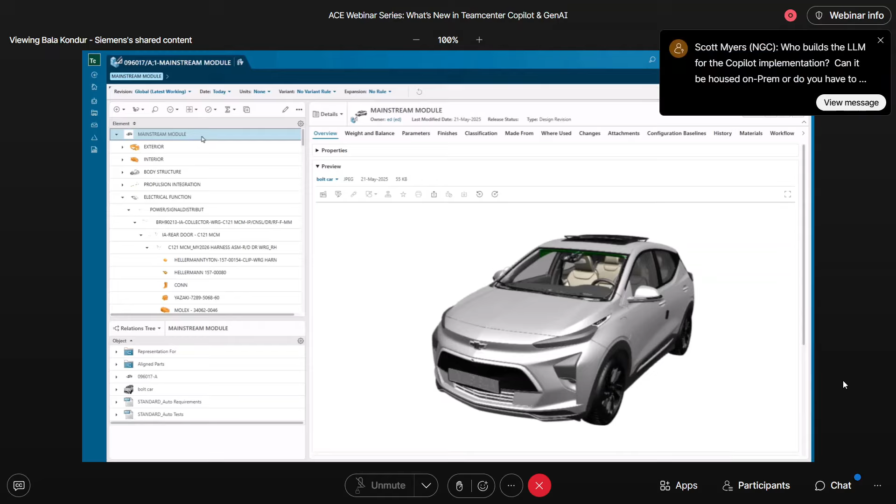This is Teamcenter, the active workspace interface—most of you have already seen it and started using it. Here I'm in the BOM application, called the ACE in active workspace. I have a bill of material structure open on the left, and the BOM itself has various documents attached to it. In this case, I have a couple of PDF documents attached, which is kind of typical—you just open a BOM, and the BOM is attached to documents, what you might commonly see in your organizations too.

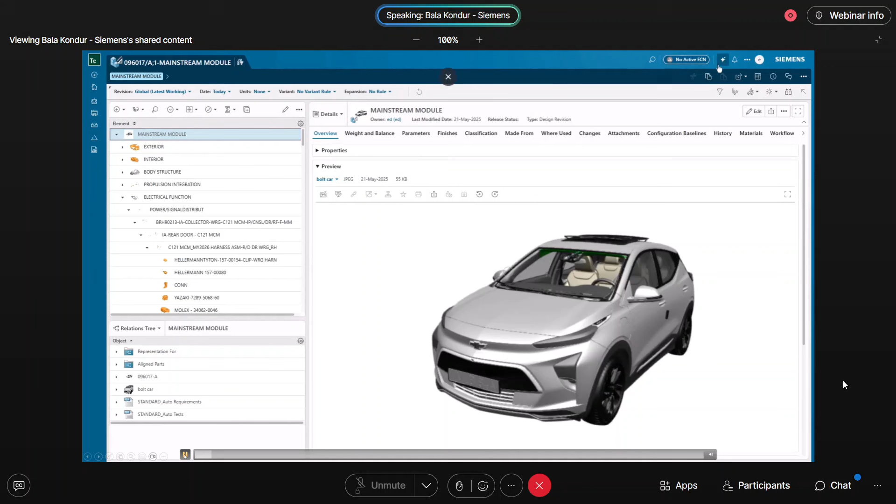I'm going to go ahead, and now you'll see me open the Copilot. I popped out the Copilot, and I open the requirements spec here—it happens to be a PDF document, almost a 400-page document. Just pay attention to the drop downs here as I run this video on the right.

So I click the dropdown, and if you look at the context, I selected the currently open document. So I've focused the Copilot on this document, the one that's currently open, and I'm going to proceed and start researching this document by asking a question.

It's an automotive spec, so I'm asking a question about the ADAS system, and I'm also directing it to generate the output in a certain format that I require. I said generate this in tabular form, and also highlight numerical values, numerical number ranges, and it did that.

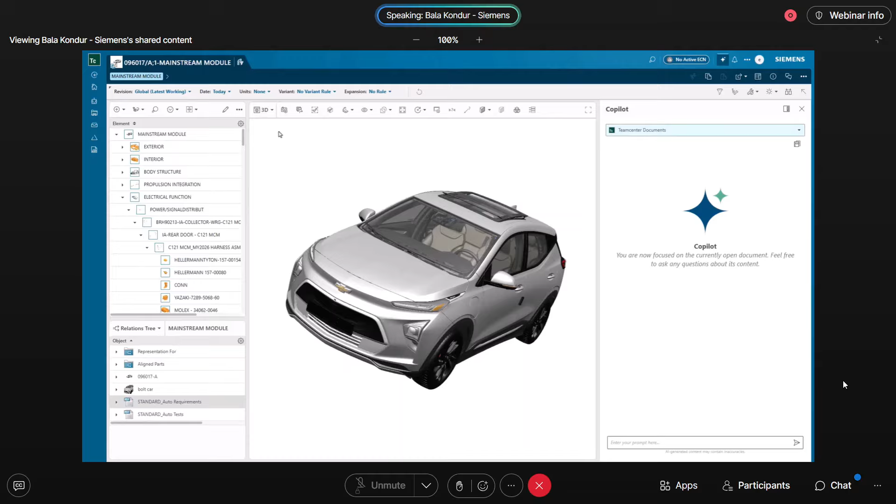Now let's do a BOM focus here. Let's say I switch to visualization mode, and now I'll go into the BOM mode. I said, let's focus on the currently open BOM. And then I come back here and ask a question: locate me the radar on the BOM.

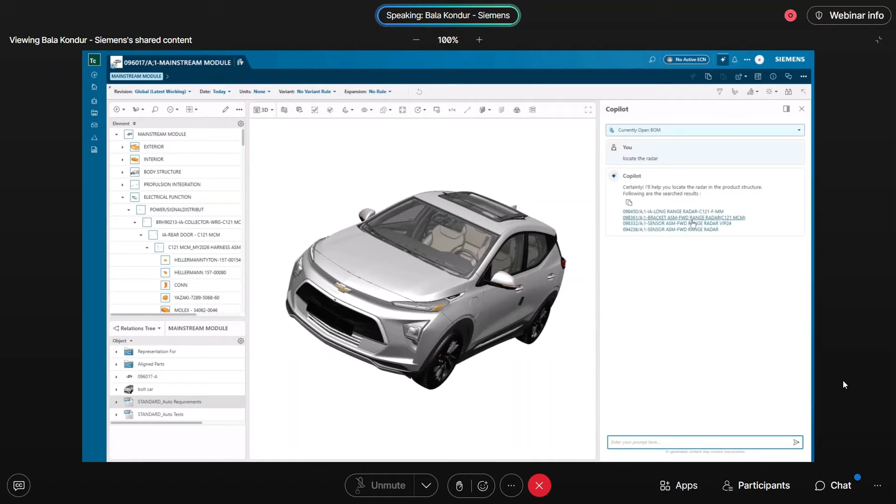So I get some hits here, and then I select the first hit, it's a radar there. And I follow it up with simply a natural language question: do me a proximity filter around the component selected.

So broadly, you can use the Copilot to interact with documents, interact with requirements, either in collections or single documents, and you can switch to the BOM focus. You can do what you might otherwise do with smart discovery, most of those commands, using natural language. You can also do work sets, issuing instructions to create work sets, proximity filters, and a lot more.

So a lot of things that you would otherwise have to use commands to perform, you can now perform with the Copilot. It's both knowledge discovery and ease of use. So these are the things that we're enabling with the Copilot.

Okay, so to put this in context and summarize what's available with the 2506 Copilot: the broad functions are document centric. One set of functions is related to documents and text, and you can interact with these documents and collections. You could have maybe 10,000 documents, and ask a general ChatGPT kind of question on all of them. If there's a relevant document pertaining to the question, it'll generate a response, and you can see what document was used as the source. That's the first mode, and you can also focus on single documents.

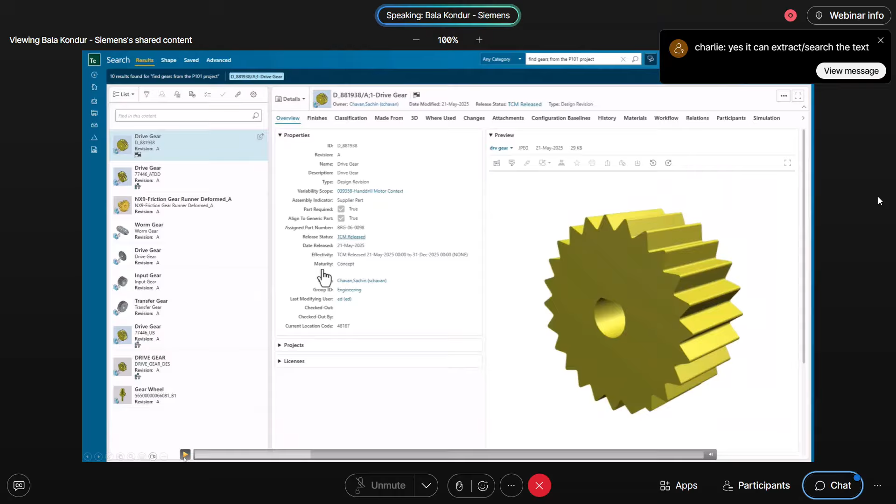So here I toggle natural language search on. And if you notice here, I just asked a very conversational question, right? I said, okay, find me all the gears from such and such a project. And I didn't have to very specifically structure my keyword search, right? I didn't use ands and ors and things like that. I just spoke my mind here, right? You can do things like this.

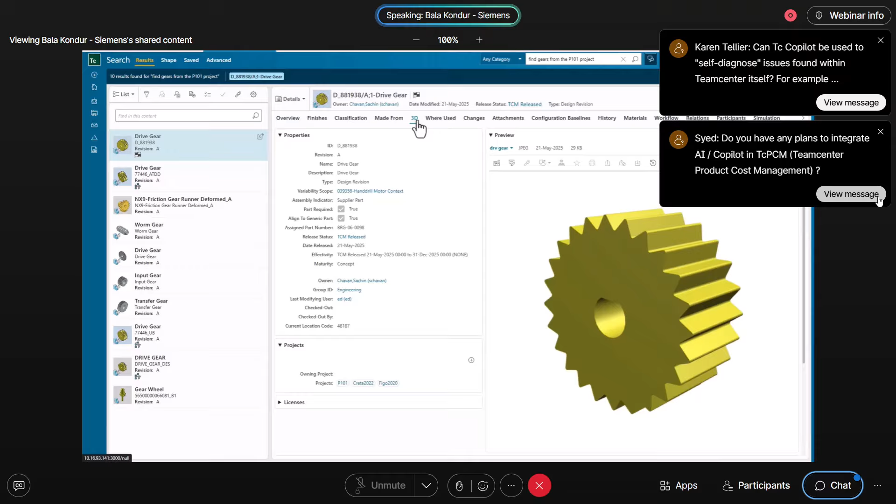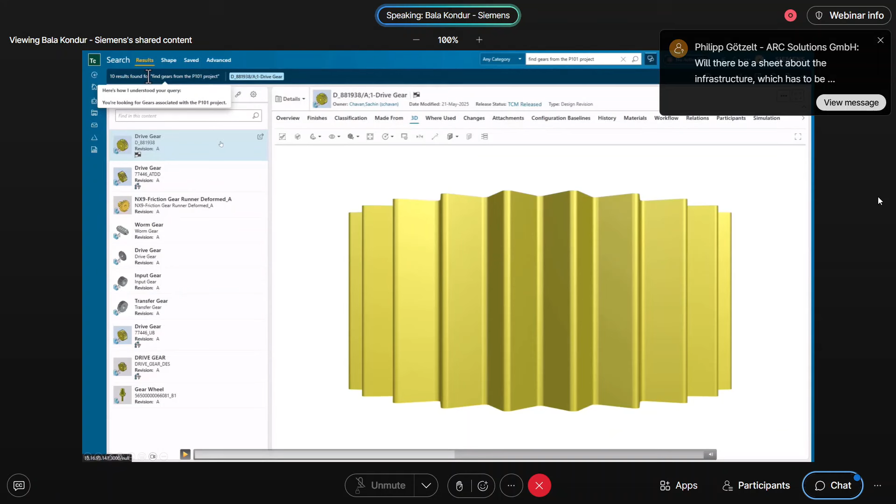You can just go ahead and ask your question, and it will interpret your question, and it will always play back the interpretation, right? Because that's important. So if you look here, it plays back the AI interpreted, how the AI model interpreted the user's intent, is always played back here. So it's saying that, oh, you're looking for gears associated with such and such a project. That looks good, right? And so you go ahead and it runs a query for you.

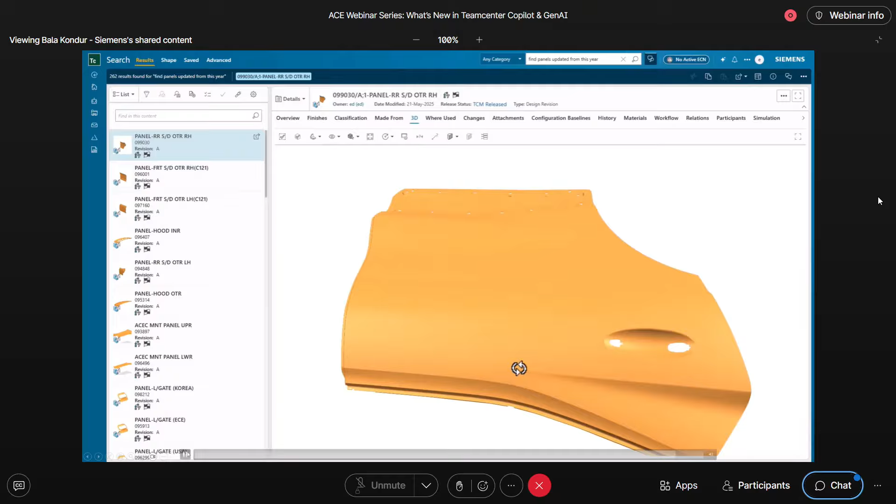And you can also do combinations of types, properties, time ranges, data ownership, and things like that, right? Here, for example, I used a keyword. I said, find panels updated from this year. This is a very straightforward question to a human person, right? I mean, you get it right away. But from an AI perspective, there's quite a few things involved here, right?

Because I said 'find' — this is my intent, right? I said, I'm searching for something. And then this was my keyword, right? Panel was not a type, it's not a property, but it's actually a keyword. It picked up on the keyword. And here I'm implying and indicating a time range. So you can interpret even these nuanced queries, right?

And you can make this much bigger. You can say, find panels updated this year, owned by this group, released such and such, etc. You can do all that. This is available in Teamcenter 25.06, and yeah, you can absolutely start using this with 25.06, and this is also available in the 24.12 release.

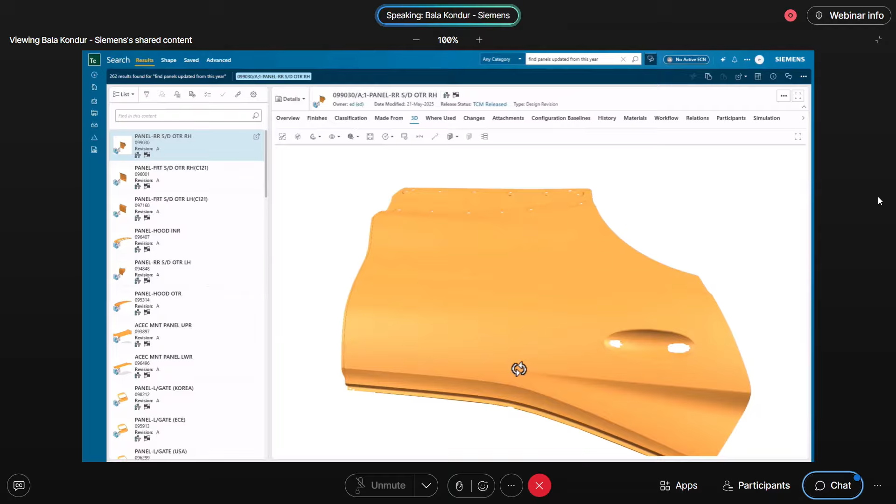And this is technology that we are really excited to launch, right? And I must contextualize this. This is kind of a base AI technology that we are introducing in the product, and we plan to layer other higher value use cases on top of it.

So what you can do with this is, right, you can take pictures. If you're a person on the shop floor, or you're perhaps a service engineer working in the field, and you want to take a picture of a part. Maybe the part is in need of service. You're looking for a replacement part, etc. You can take a picture, and you can match it back in Teamcenter to the NX models themselves, to an actual CAD model that is the closest match to the picture or the photo that you uploaded.

So here, in this case, I go here, right, I took this picture on the field, I have an image, or maybe it's a catalog image.

I come back here, and I'm able to match it with NX, with an existing NX model.

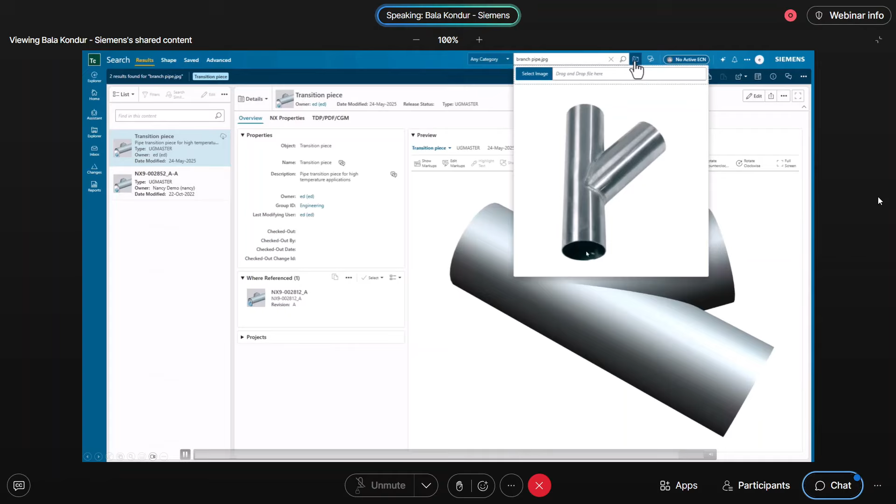Going forward, this introduces a whole new modality, an AI modality. The use cases we talked about thus far are mostly text, querying, and this takes it to the next level. We're starting to deal with non-text modalities here.

So the things we want to layer on top of this are problem reporting workflows or issue reporting workflows, where a problem is reported in the field, and pictures are taken of the problem and added to the problem report. As the problem report flows through the system, it's automatically AI augmented.

So the AI is going to give you recommendations, okay, these are the parts that, looking at the images attached to the problem, these are potentially the parts and models that you may want to look at that may be impacted. So that kind of pre-intelligence helps, but by the time the problem report gets to the engineer triaging the problem, they already have all this information in hand. It's use cases like that we're planning to layer on top of this.

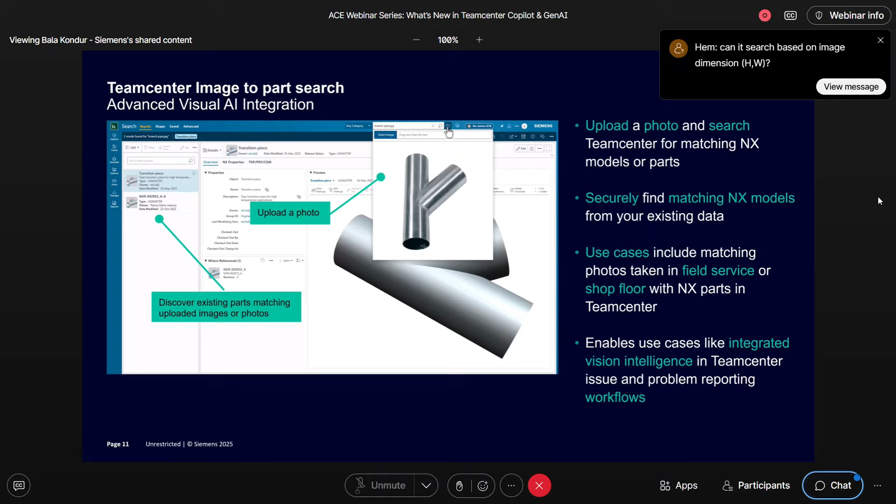Okay, now let's do a quick recap and talk about customer journey paths. In the interest of time, and to leave more time for Q&A, I'll quickly go through this, not spending a whole lot of time on it.

So we started in 2406, where we laid the foundations for secure AI - how to take this whole new, rapidly evolving technology of generative AI and safely connect it with Teamcenter. The operative word being safe here, because you can do a lot of things with AI that can really be risky. So for us, security was paramount in all this.

We started early, even when ChatGPT was first released, towards the end of 2022 or thereabouts. By then, we were already engaging with them. We built the framework and the pieces in 2406, and we released AI chat.

We followed that up with natural language search in 2412, and we continuously update our support for newer models. As new GPT models are released, newer AWS models are released, we look at the models that are doing better, which are trending more positively, and we start looking to evaluate and certify those models.